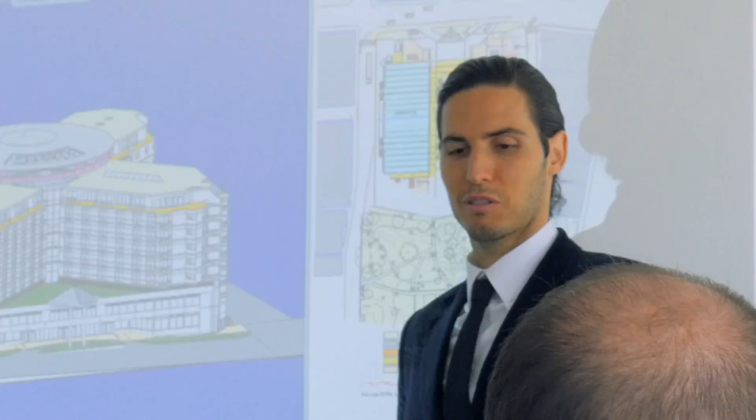The new requirements and legislations may seem too complicated to follow. Our mission behind ARCHLine is to open a gateway to BIM. ARCHLine makes the transition from 2D drafting to BIM step by step. It takes you from 2D to 3D modeling and introduces BIM parameters to your workflow. Sharing your projects with other professionals is effortless. The software makes sure you can use your already existing CAD skills, files and projects to stay competitive. The gate is now open for new challenges and previously unavailable projects.

ARCHLine is an out-of-the-box IFC-certified BIM software. No extra plugins are needed to complete your project because your design will contain everything in a single file. You will work together with other parties of the building industry seamlessly. Avoid misunderstandings. Use real products. Collaborate better than before. BIM is quickly becoming the standard. Make sure you are there with ARCHLine.

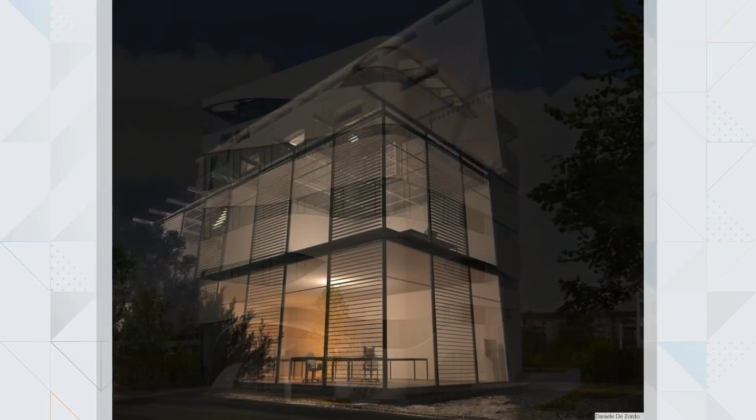Well, this is just a quick selection of images rendered out of ARCHLine models. Some of them were rendered with the integrated renderer, from Redway, the company that creates the rendering engine. Some of them are created with external renderers. I will also show you how you can export your model to perhaps an existing external renderer.

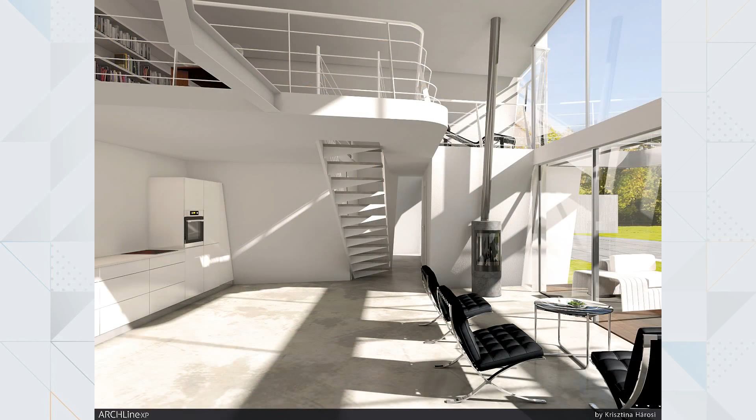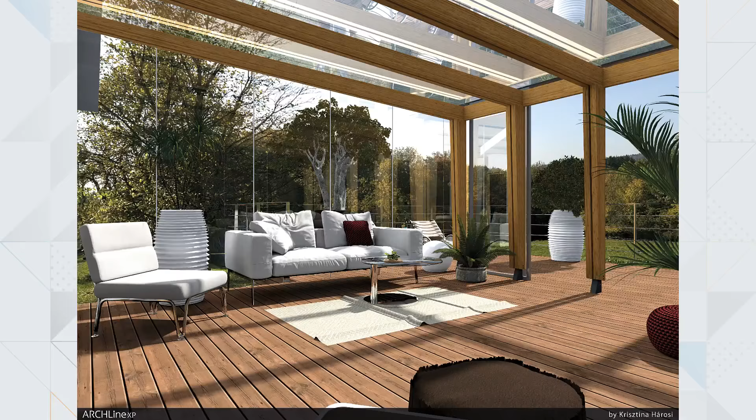As you can see, the project types are various. You can create a small project or a large project, industrial, residential, a school, a shop, or an interior. So it really depends on the project, but it's never limited from the side of ARCHLine, nor from the side of visualization. So with this model, we will try to somehow introduce that.

Yes, so this model could actually be familiar to you. That was the sort of example project we used for almost all the topics we wanted to discuss so far. So before we actually talk about rendering, because that is a huge topic, I think there's one issue we should cover.

We frequently talked about how to bring in information from external sources, one of these sources being Google Maps and Google Earth. Now, a lot of you asked us what happens on the other end of this process — how can you bring this information, what you just designed in ARCHLine, back into Google Maps?

Yeah, that's one type of visualization, for example conceptual visualization. This model is a simpler version of what we achieved earlier with all the details. This is what I will first show you, how you can position it. We actually covered that part, but I think it's worth polishing this knowledge, and then I'll show you how to visualize this model on Google Earth.

First things first, ARCHLine is directly connecting to the Google Maps service. You can use it for free. It's accessible from here. If you go to BIM and set up the project parameters, you will find the project location.

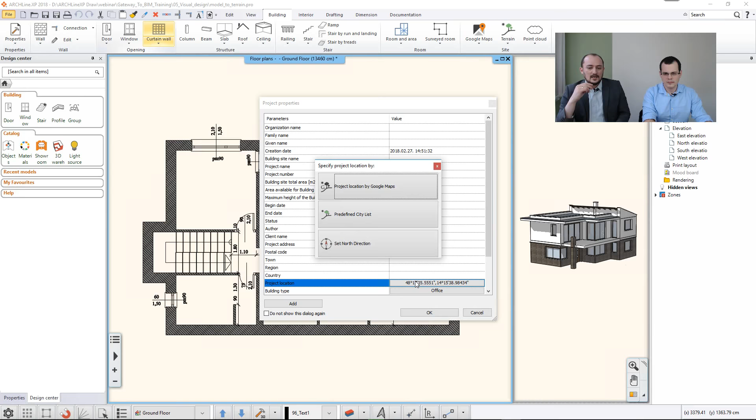This location can be set three ways. The last one is only the north direction, but the other two actually set up the location either by selecting the view from a city list or by setting up the project location in Google Maps. You can also find this in the building node here in Google Maps, with all these options.

When you want to set up the project location, you can go to Google Maps, and either you already find something similar to what you'd like to select, because Google finds your location and positions the marker by default where you are, or you can simply type the address. In this case, we use an Austrian city for this location, which is an empty building site.

That is going to be the address where we are going to put our building. So I just type this address and it finds it. Well, actually we are already there - it just refined the position, but this way you can make your marker appear at the location where you'd like to place your building.

There's one certain point, called the project origin of the building, that will be located over there. If this map view isn't enough, just zoom in and find a satellite view, then position it - that's the empty field, the empty building site I'm talking about. Let me zoom in a little more. So I place my building somewhere around the corner of this site, and when I hit OK, I've set up the building location.

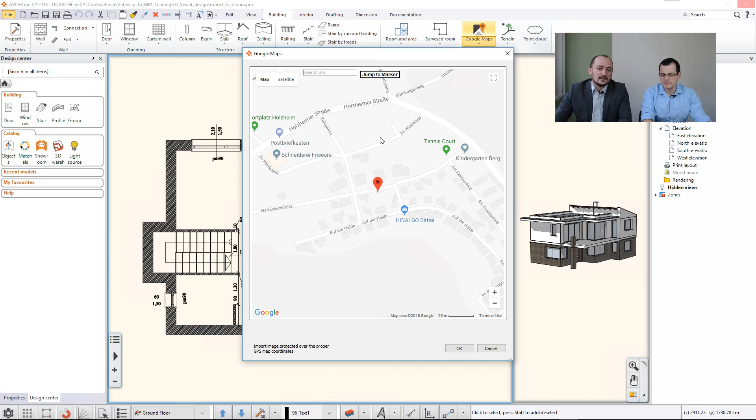But to test whether it's proper, you can use this second option, which is importing the map as a raster image. So using this option, I can just go there - I don't even have to search the field, because this way it already locates the proper site. And then I just zoom in. It's important to zoom in to the view as much as you want it to be cut off, because that's how the import will work.

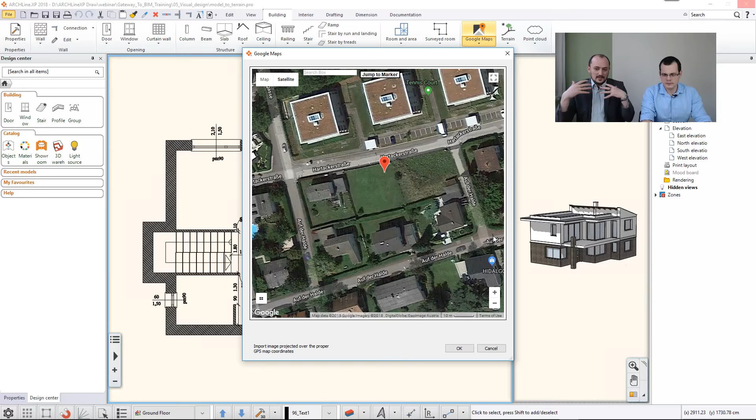Everything outside this frame will be cut off, so if I zoom in, I'll have a more detailed raster image imported. Now I just say okay, let's import it, and I should apply the north direction because I already set it. And then I'll see whether I like the result or not.

Now, why is that? I can't find the building in the location where I specified - we did do it, but it's not appearing there.

In this phase, I did not take care of the project origin, which is normal - I didn't set it up. Let me erase this. Remember it was someplace here. So if I erase this, I see the project origin uncovered. Actually the software did everything well, I just forgot to set this to the right top corner, for example.

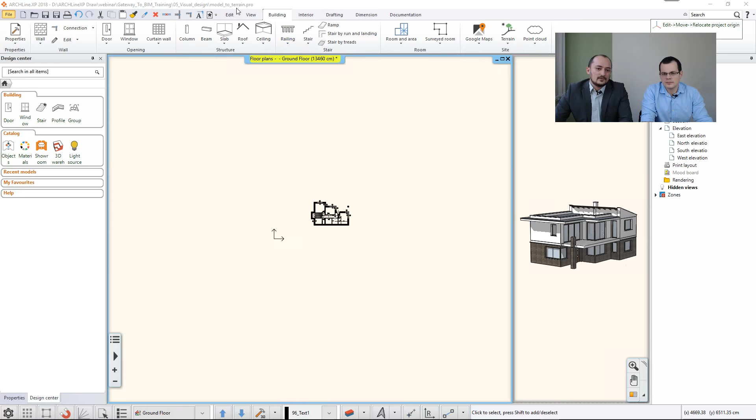This option can be found many ways, but let me highlight one feature of this interface. If you forget where to find a command - for example, I don't use the project origin command very often, but I know there's an option like that - I just type 'project origin' and the software finds it for me. It also teaches me that it's actually in Edit, Move, so I should find it there, and that's the relocate project origin.

Now I need to set up the project origin someplace where these two virtually intersect each other. Let's recalculate this whole thing and import it again. So I go back to the building, Google Maps, import map as raster image, and repeat the same steps. Let me quickly go back to satellite and zoom in. I think this will be fine. Now everything should appear fine because the north direction is okay, the location is okay - it's nicely done and everything is fine.

If I would like to refine it, I can of course repeat this step as many times as I want. But now that I'm done, I would just like to visualize this on Google Earth.

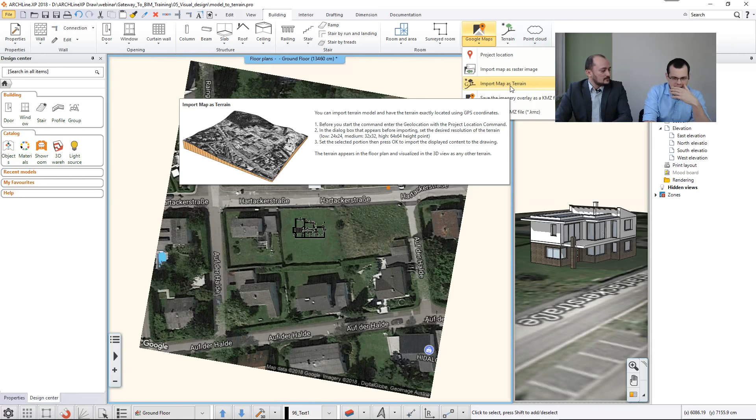Before we do that, let me mention that you can also import the terrain as well - not just this flat ground, but the terrain with height values. Remember during the first show, we created a terrain from two-dimensional data. This is somewhat similar - in this case, you would get the map as a raster image superimposed onto a terrain.

But now let's see how this works sort of backwards, getting this model out to Google Earth. One benefit of exporting to Google Earth is that your clients can take a look at the project in the actual surroundings without having to install any complicated products or CAD software - they just have to download Google Earth and open the file, right?

Yeah, that's right, and there will be one more advantage which I'll show when the model appears on Google Earth. To export this, I need to go here and say I'd like to export the 3D as a KMZ file - KMZ is the format we need now. Then let's just export it, and I'll override the previously created file I have here. Yes, create, and replace it.

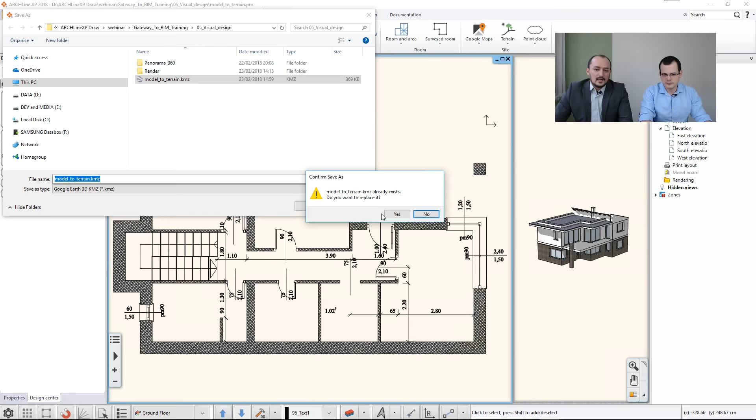This is an important question: since I already created the terrain, I don't need to export the terrain itself, because Google Earth already has a big terrain model, so I don't need to overlap them on top of each other or duplicate them. So I just say yes, please keep the terrain, and then it generates the file, and I can go to Google Earth, which I already opened here, and open that.

This file is in my libraries here, so I just double click it. What happens is Google Earth zooms into that area as much as needed to see this model, how it appears. Where is it actually? So that's the question - where is my model? I positioned it there, but what happens here? Now, because I did not set up a very important value, I cannot see the model.

Let me first show you how even then you can fix this, and then show you what I should do to improve this. So actually, there's the model here - it's in the temporary places. So I have my model, it's okay, I have this project appearing here.

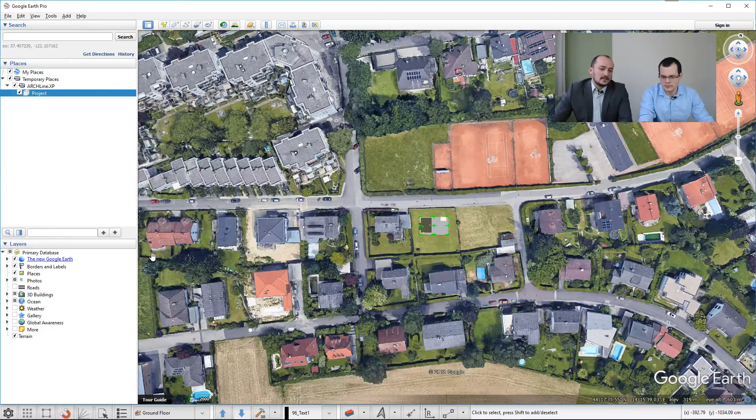But if I right-click there and say let's see the properties and the altitude of this model, that's important - it's not set properly. I don't know the proper height, but certainly this altitude is not correct. So what I should do is select 'clamp to ground' instead, say okay, and then it appears just as fine as necessary. I see.

Now it's clamped to ground, so whenever I move it, it will always stay clamped to ground. Even if I place it here, I can actually move it. So, is there a way to fine tune it? I think it should be rotated a little bit.

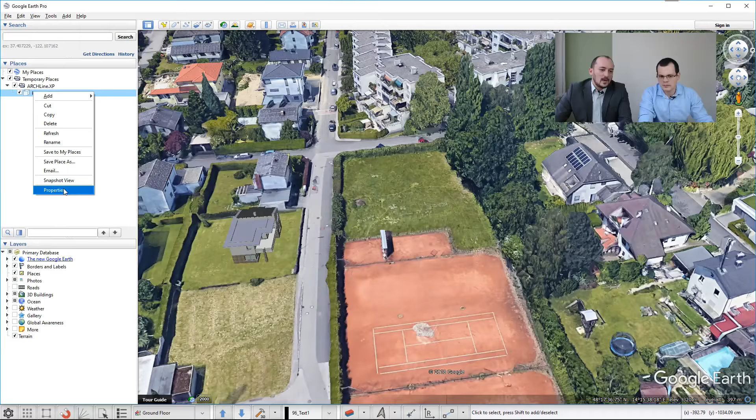I just do the same thing again. I go to Properties, and when this Properties dialog appears, a few markers appear. If I click and drag the center point, I can move it someplace else. I can also rescale it, which I nearly never do. But with this one, I can actually rotate the model and refine its position.

If my positioning wasn't accurate, or if the satellite view is further developed or updated and there's a slight difference from what I used, then I can use this to fix it. And there's an advantage here: the surrounding is modeled. It's not everywhere on Earth, but where you can access it, you get a nice 3D surrounding with all the details — literally surrounding your building. Some places are a bit rough, but it's a very good approximation of what will happen here, and a good way to visualize how the project will actually look on that exact location.

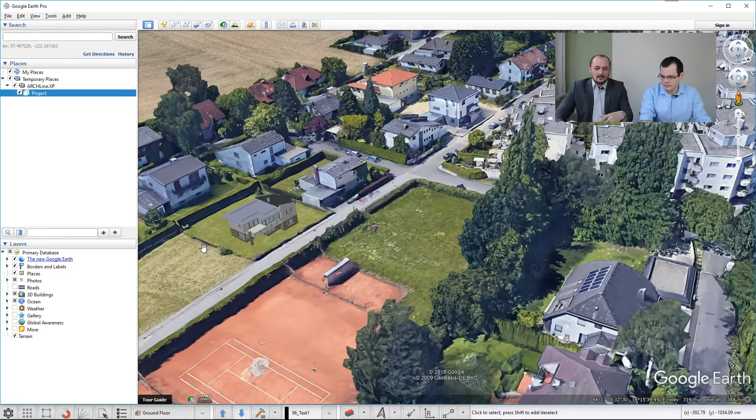What should I do to avoid this mispositioning in ARCHLine? For that, all I have to do is go back to ARCHLine. Let me just minimize this and go back.

What I did not do here in the 3D, we actually talked about when we covered the terrain. In the 2D, I can change the settings for the levels, and there's a very important value: the building elevation above sea level. I believe there we should use something around 300 and some meters, but it was not set like that. Actually, if I import the terrain and then position the building on the terrain, it would automatically solve this issue, so I'd have no problem like that.

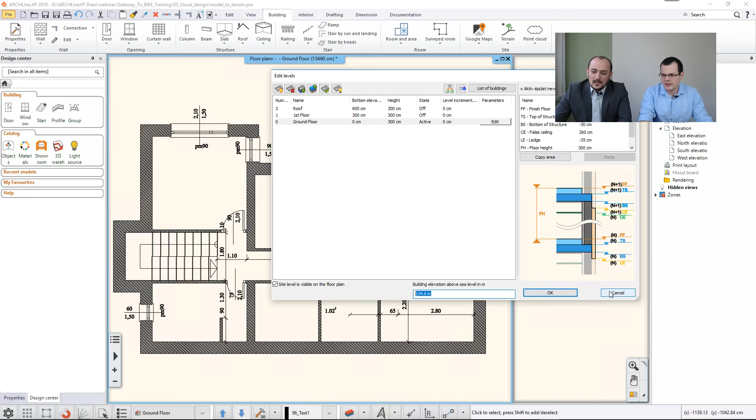But if this happens, no problem — you can fix it either way. So that's about the building visualization, and how to put the project back to sort of reality using Google Maps.

Now, another huge topic we have to cover today is rendering itself. How your renders turn out, as far as I see, depends on two major factors: how the lighting is set up, and how the material settings are managed. Let's proceed one by one, starting with the lighting issue, because you are able to model lighting and lighting effects in ARCHLine — perhaps you can tell more about how they work.

Rendering is all about lighting and materials, just as in reality. If you'd like to take a photograph, light is essential — you won't see anything if there's no light. You can already set up how the sunlight comes in; we covered that part in an earlier session. Now let's talk about artificial lights.

We actually have a few lamps already set here. The difference between these and regular objects is that they don't just represent the body of a lamp, but also have something we call a light source, which appears like a bulb. You can have several light sources, multiple light sources, for one object. The rule is that if you have an object, you can add a light source by going to its local menu, selecting Lighting, and Add/Edit Light Source.

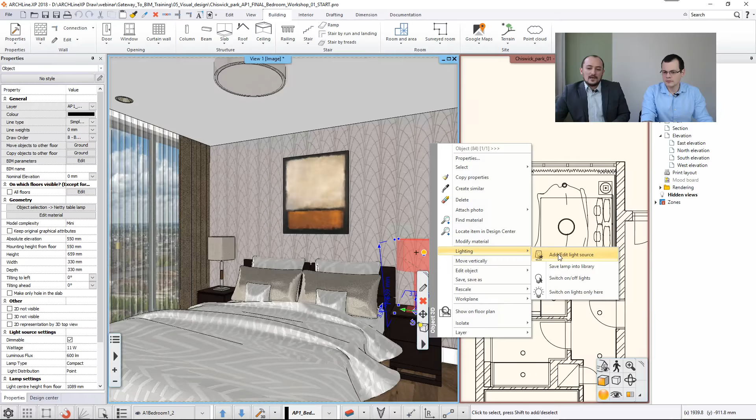By going here, you can make changes: select this existing light source, add another one, change it, go to the libraries and find something you like. You can also create your own light sources, and if you have IES files — those factory standard measurement files — you can use those. They will always give you the most realistic result. But if you don't have them, you can use the built-in default light sources, which will also give a very good result.

So now, how to test whether it's fine — for this, you should always create a render.

Now, talking about rendering, there are several options here, and for this reason, one of the most interesting ways of creating a rendered image is the integrated rendering. And also integrated rendering has two options: one is for the finals, for the final images, and this is for the real-time draft, which I use in between to create my work, my draft renders.

So what I do, I just simply set up a smaller resolution. And then I think I will just leave these options as they are, because I see that they are everywhere, they are fine. Just to cover a little bit of these: this is why I will see the light sources, this is why I will see the sunlight coming in, and this is why I will see something we call bump mapping in ARCHLine, which gives the materials you set up a nice surface feature effect that you can turn on or off, and of course the background, that's something you can set up.

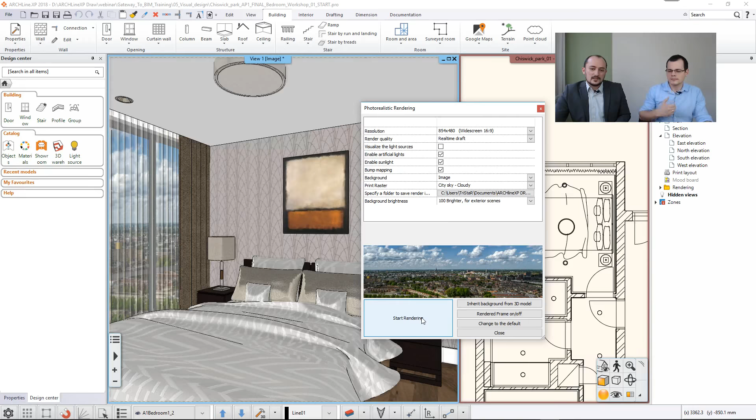So let's just create a render and let's see what happens. Actually, this is what always happens: the software generates the model, it gives it to the renderer, and the renderer opens in a window if it's integrated, or if it opens in a new application, a totally separate application which you can then handle besides ARCHLine. So now I could do something else in the software and I don't have to keep this thing in my view, I could put it somewhere else, right?

Yes, yes, because this is like a regular, normal ARCHLine window. You can go back to the 3D. You can just click on this switch views icon, and then it will be organized aside with all the rest.

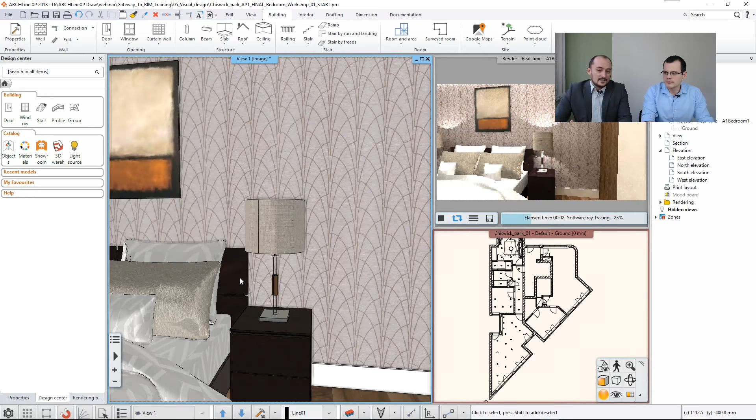So why is it real-time draft? It's real-time draft because whatever I do here, it auto updates the view in the rendering, which is very handy if you are about to set up lights, for example. Let's see how this looks if I turn it off.

If you have a light source like this, if you have a lamp like this, you always have an option at the left-hand side, which gives you the opportunity to handle it as an object, which it is. It also gives you the opportunity to handle its light sources. If it has multiple, you can handle them together by simply turning them on or off, and then you will see the result in the 3D real-time draft. So it's actually the rendering window which shows you the lights as well.

Yes, yes, yes. And actually, it's literally a draft. It's not for finals, you won't send these images to your clients, you will send the finals. But what you need at this point is a very quick approach of what will happen in the final image, but the final image is more crisp and much brighter, much like an enhanced version of what we see here. So that saves a lot of time for you, because that way you can see instant results for your settings, and you don't have to spend too much time doing final renders and realizing you have to change something. That time is over when you create something and wait minutes to realize something was missing, something that you need to recreate.

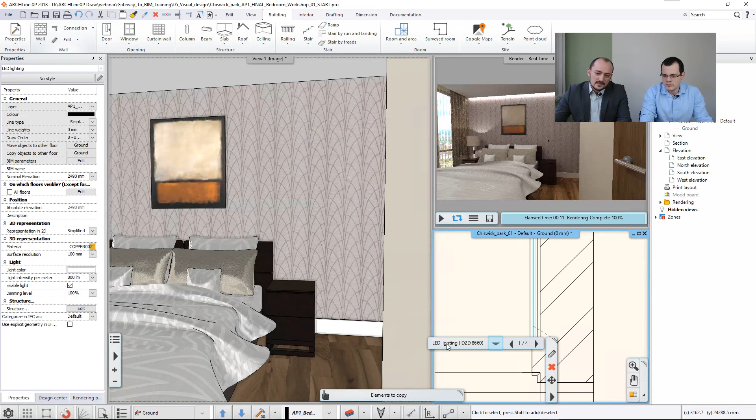Well, actually, if you would like to create light sources, there are many ways. If you would like to create lamps, there are many ways. First, I will show you how to create a new lamp to this place, which I actually erase now. And now I show you how you can create something like this, for example, here. This is an LED strip that we can find here in the 2D window. Let me just erase this. This is an LED lighting. So I just erased that, and the draft updates automatically showing you that now it's gone. Actually, this is the same as if I had turned it off.

But now let me show you how you can actually create that, because I think it's a cool thing to do. Here in lighting, there's the LED light strip. This tool is very simple to use. You just set up the first point, and as you can see, it's literally like drawing a linear item, like a balustrade or a railing or something like that. So I can create a U shape or something like that. When I hit enter, the software creates that.

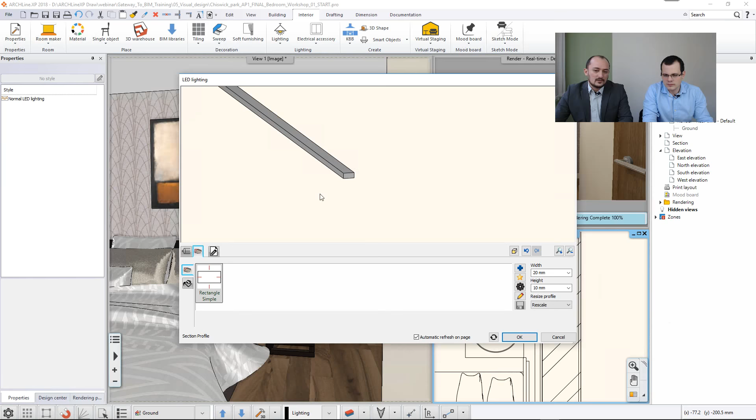I can set up the intensity, the dimming. I can set up some nice orange-like color. I can enable or disable this whole thing. I can set up the cross-section for this actual profile, what I can see here. I can also change its size, and I can also change its material.

So I changed its color to orange, but it's not orange, because what we see here, when it's off, when it's not lighting, or not in a situation where we can see its light, it will be represented as a copper surface.

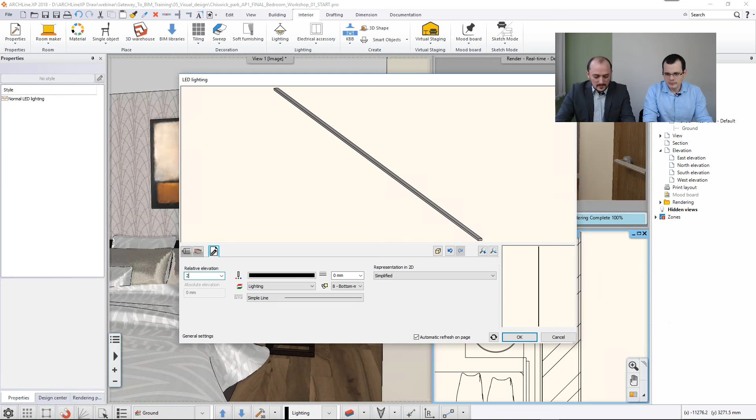So let's just create that, and don't forget to set up the relative elevation, which is measured from the floor. Now it's 2,000, perhaps 600. And let's say, okay, let's just create that.

So the software generates it here, and it also generates at the top. So what you will see, you can change the intensity. This way, it's right away, out of the box.

Actually, what I'm working on is an i7, so it's a quite powerful computer. But in a less powerful environment, like an i5, you will also get results in seconds. That's why the real-time draft is a wonderful thing.

Now, how about adding additional light sources? Adding additional light sources to objects, turning them into objects plus light sources equal lamps - you need to first, for example, download something from 3D Warehouse. The 3D Warehouse we refer to quite often, actually. This is one of the external libraries from where you can bring in data.

Actually I could use the BIM libraries as well. I can import things from BIMobjects.com or Cadenas or other sources. The way is the same.

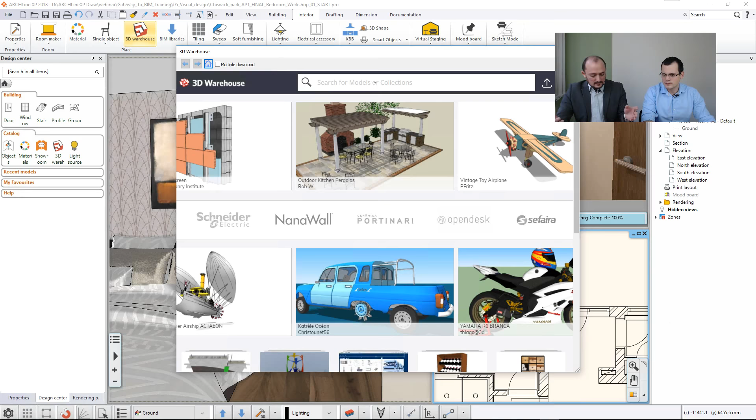So you just find something. I think what we use, I think it was a swing table lamp. Yeah, I just took note here. I like that, I already think that one would fit the project. I think this, it's something that fits the design.

And then, well, you find something like this, you think you like it, you just go download and go with the latest, because... Do they have built-in light sources, or how would that work? They don't, but the software can generate based on a very simple rule.

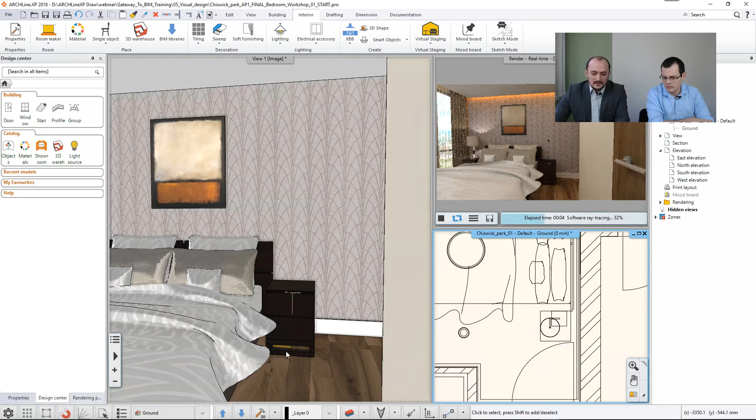Let me just place it here. I just placed it on the floor, so it is literally on the floor. So let me just select that and then elevate it. I just use this up arrow, or I'd say elevate here. So I just place it on top of the surface of this furniture.

Nightstand. As you can see, well, actually this has a light source, but it's not because it had a light source originally. It's because ARCHLine, when it downloads something from the 3D warehouse and the object is named like something light, something lamp, or the name contains something that suggests this should be a lamp, ARCHLine will automatically attach a very simple light source to the bottom of this model.

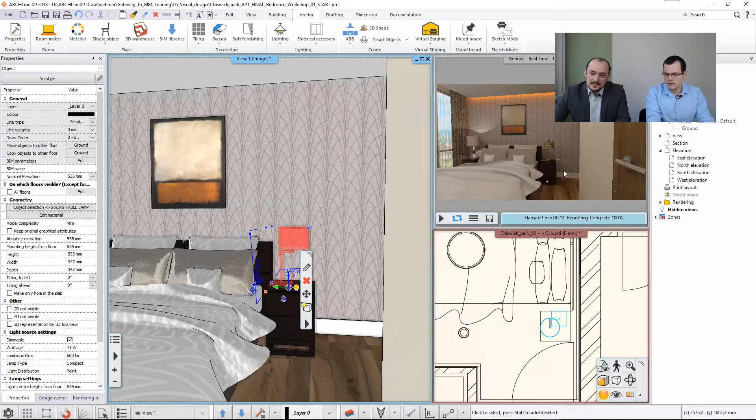And from there you can easily elevate it to someplace else. So that's what I will do. Actually, I can see something here at the right hand side. Let me just zoom into the model, and as you can see here, there is something, and it's from this lamp.

If I would turn it off and on, I could see that this is disappearing, so it's actually because it's here at the bottom. If I just click here, the software changes to the light source, and then I can just pick that point, click on it, move, and elevate it someplace inside the shade.

Now, when you position something like this, take care that you won't end up in a solid body of something. So put it right in the shade and not like this - I could put it here, but of course in that case I would end up with something not realistic.

One thing to ask here: you said that the software recognizes certain elements and assigns light sources to them automatically. I have two questions regarding that. How can you change the light source that the software assigns to the lamps? And how can you add additional sources of light if the software, for whatever reason, maybe because of the naming, fails to add the light sources?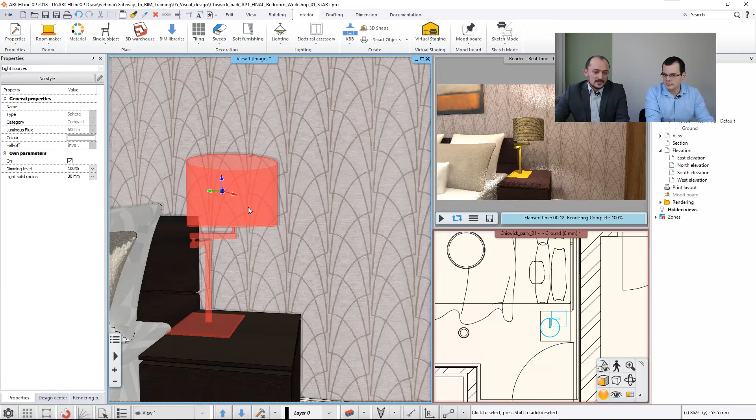Well, actually, that's the same thing as in the beginning, we created or we did it. We just select the item, either in 2D or 3D - it doesn't make any change. You just go to the lighting and edit light source.

So in that case, you will end up with the same dialog. You can also refine its position here, set up a top view and see it's off the center, so I place it somewhere in the center, and check from different views. If I'd like to erase this, I can select something else, or add a new one, second, third, like a chandelier, adding multiple light sources. This way it's done, and the software will update it accordingly.

Perfect. Now let's talk about the lighting side of things. We'll refer back to this topic, but let's proceed with finishes and materials, because I think that's the other factor which has a large effect on how your renders turn out. So what can you tell us about that?

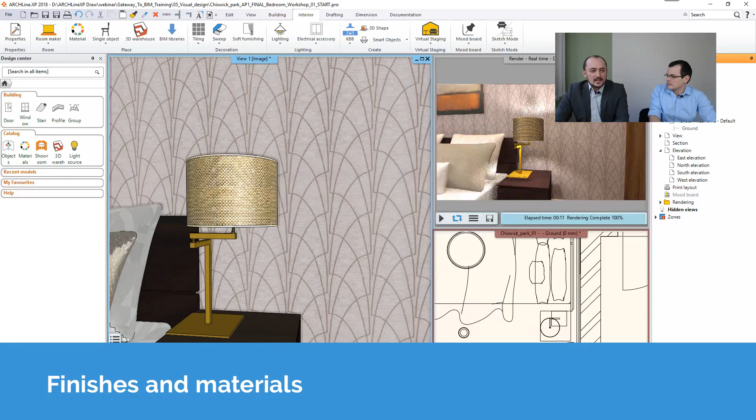The selection of your choice of material will not only change the realism of your rendering, but it will also change rendering time, because the more complex your material is, the result will be calculated longer as well. But of course, many times in sacrifice of the quality. So what can we do here?

Let's start simple. Now we have an imported object which has colors and textures on it, but they are not necessarily set well. So if you'd like to find a material, like represent this as a copper surface or gold, I right click here and say find the material. The software will find that material for me on the left hand side, and as you can see, it's set to be general, no reflection or very small reflections, so that's why it's not like a metal surface. You can go to the libraries, the types, and change this type to something else like metal. By default it will be very much like chrome, but you can change its reflection. Remove a little bit of this reflection, and the color will just face the surface, and you can see it much better.

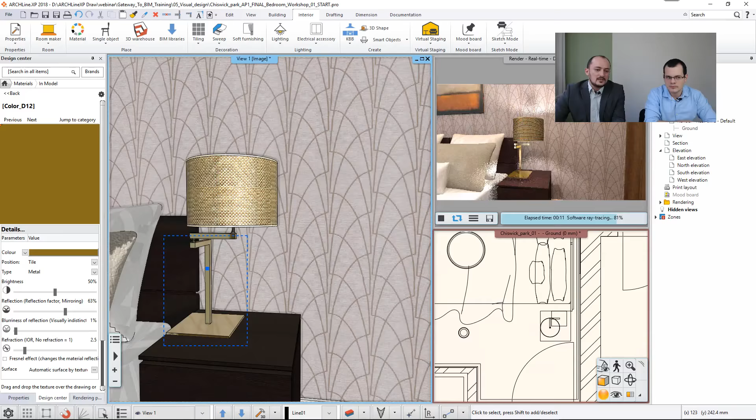You can also make changes for materials appearing inside. If I zoom in, I can change this material, but I think it works pretty well. If I'd like to turn this into something like a metal again, I just right click there, find it, and turn it into a metal surface. So that's how I can do that.

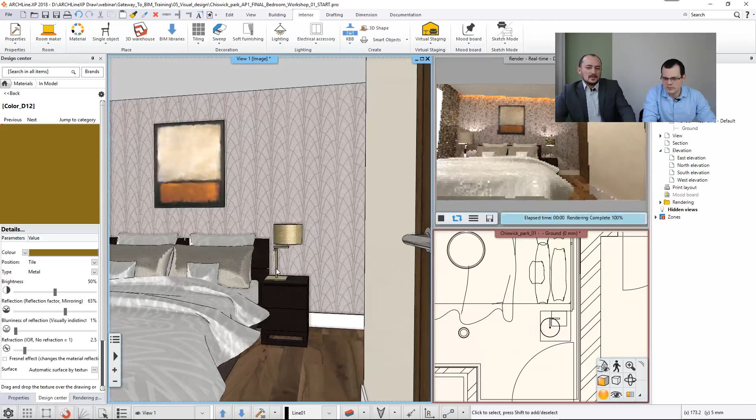But actually, setting up materials is also about importance. In reality, I wouldn't start with tiny materials like this, I would leave it to the end. First, I would focus on the most important materials, the dominant material. In this scene, I have a dominant floor, a dominant wall, a dominant ceiling, and also the textiles are somewhat dominant. So what I would do is first decrease the model size to what's most important for me, set up the settings, and then move on.

This can be easily done by using the layer management of the software. To filter the model, you can either start from the 2D, filter it, and regenerate the 3D. But if you already have the model fully generated, you can do the same thing here. All you need to do is open up the layer walk. Yes, and here you can find all those layers that you've created. My suggestion is that you should, at least if you're working on an interior design like we do now here, distinguish what you have from room to room.

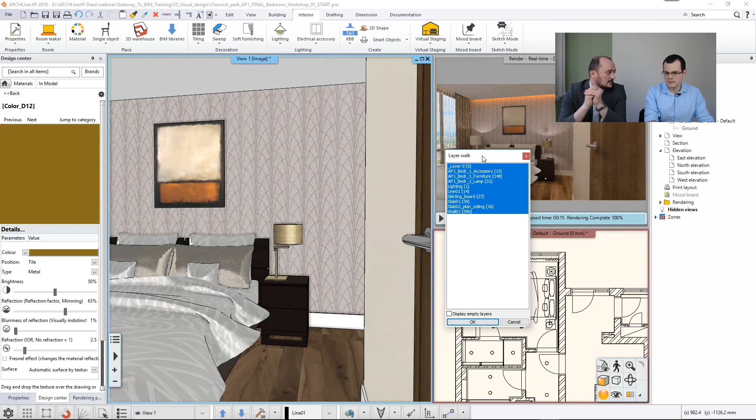Separate the content as accessories in one layer, furniture in one layer, and lamps in one layer, and the rest can go anywhere else, because usually the interior is the most complex. If you work with exterior scenes, you can do the same thing just with the foliage and other things like that. So you will just disable the less important things for now. Let me remove all these things that keep floating over there. But anyway, what we see now is just the surfaces.

What I can see here is quite a reflective floor. Let me just move the zoom someplace like this, so we can see easily that it's very much reflective.

To cover how this works, you can go to the Find Materials option, and there you can find the same settings. Now, if this is set to be mirror, this will usually be a perfect reflective surface. Well, that's a bit too much, I think. I could also tweak this, set up a blurriness for reflection, and then the reflection will be less of a perfect reflection, but more like a metal-like surface.

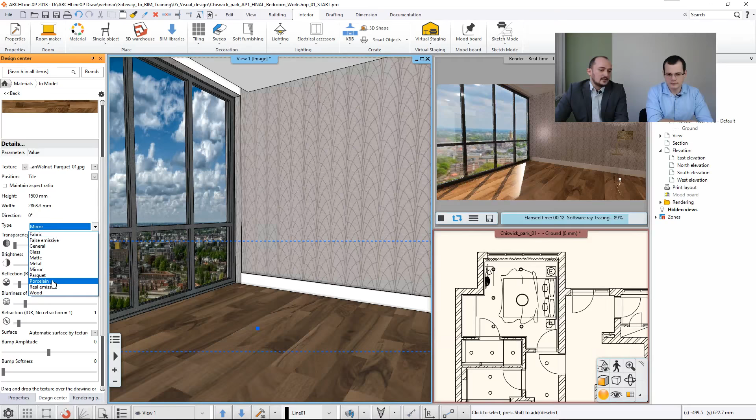But if I would like to, I can go and select something else from here. You have preset options available for these elements. Actually, I can turn this into parquet. There will be some nice settings coming with that. The software recalculates this whole thing, and it will be a little bit glossy parquet surface.

Or I can use something else like the general surface. Now, talking about general, let's use it here on this wall surface. Let's just find this wall material and see what this has. If I right-click here, find material, yeah, that's right, good, so one, find, yeah, and then let's just go there.

This is actually matte, which seems to be working fine, but actually in reality we are not surrounded with matte surfaces, not that much. Very few indeed are real matte surfaces. Most of them would fit mainly into those other categories, or if you cannot find them, in general. And what you should do, you should always add a little glossiness, a little reflection to your surface.

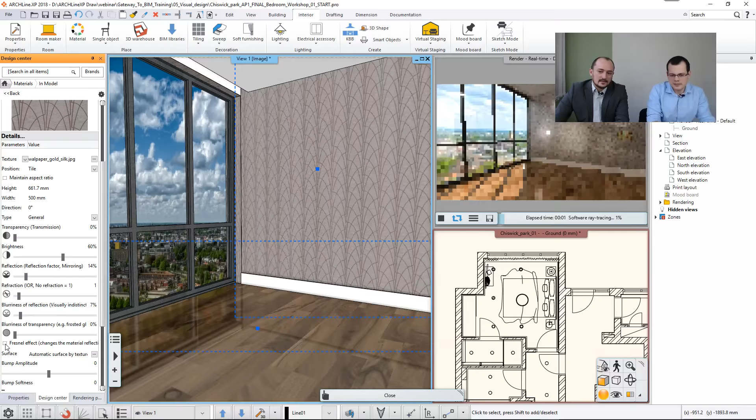What I will show you is another important, interesting thing, is that you add some reflection to this. Let me just add a little bit of blurriness, a little bit more reflection. But it's still not reflecting anything. Why is that? It's because of this Fresnel effect here. If I disable that... what is that? So it's like metal now. It's reflecting a lot, and it's metal-like because it is reflective but blurry as well.

So if I just increase this, it's much better, but still not what I want. If I enable this, then I will get a realistic surface, which is reflective, but it's reflective like our wall is reflective. Not that much, but from certain angles it will be reflective.

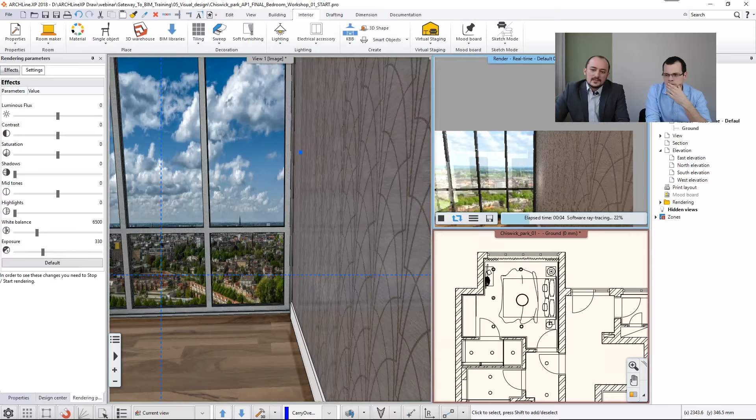Like this here, if I turn the camera to this side view, then you start to see the reflection, right? Then let me just zoom in a little bit more so we are not distracted by this lamp here. So here I should see some of these reflections appearing, but it also depends on the refraction of this item. If I increase that, this will come a little bit more, or if I decrease that, or if I increase the reflection, then it will increase or decrease this feature, which most of the surfaces around us have.

So it seems to me that the rendering process in this respect is mostly about tweaking the settings until you find the right result. So there's no clear-cut and automated way to reach the final result, right? Well, sooner or later you will end up with a lot of materials that you like, that are for your taste, that you created. You can use those. If you find a good setting, you can save that in your libraries and use that as a basis for new materials.

But also the software, just as in other cases, is shipped with built-in materials. So if nothing else, you can just find something, for example, we have built-in material for the bright white ceiling. We have built-in materials for the wallpapers. We have built-in materials for flooring and so on. So you can find those, check their settings, and adapt that to your own material, your own fabric, or whatever you create for that moment.

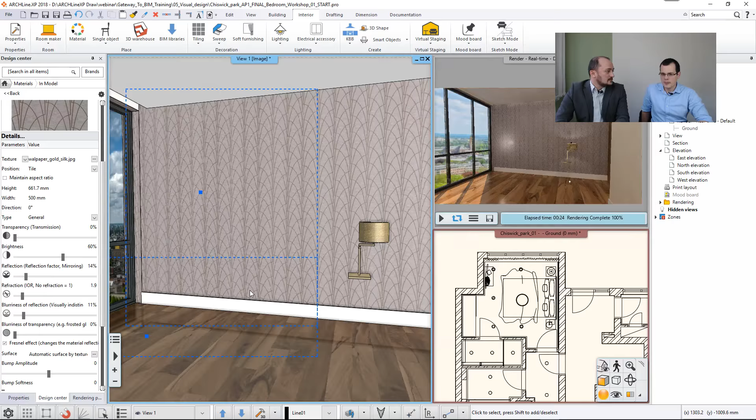Perfect. Now, we showed a couple of renderings here. We mostly talked about the interior, the integrated renders, but we also have a standalone, separate rendering engine. So how does that work?

Well, if you would like to work with third-party renderers, so if for any reason you do not want to use the built-in renderer because, for example, you already have a license for Artlantis, then you can use that. To be able to use those rendering engines, you need to actually export the model to those renders. You just build up the model you would like to visualize, then go to File and Export, and find those rendering engine outputs you would like to create, like Artlantis, Cinema 4D, Thea, or all these. Or for example, most of them also support FBX, or they also support SKP, 3ds, OBJ.

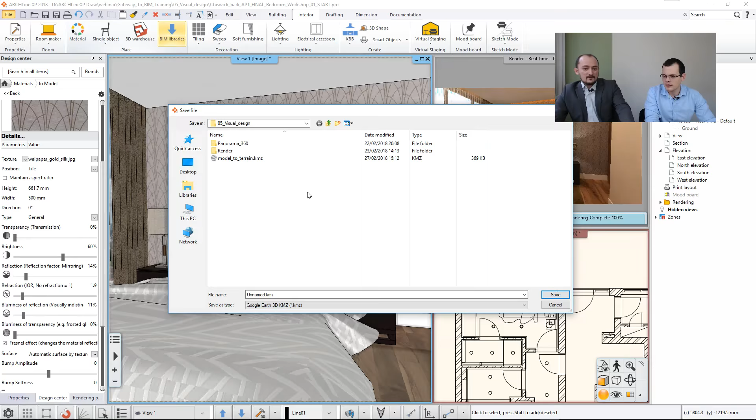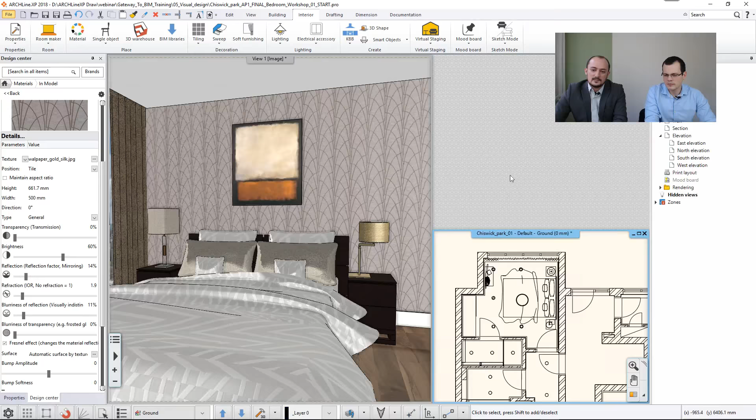You can use these file formats to export your data. But staying within ARCHLine, if you'd like to create something of production quality instead of draft quality, what you need to do is, instead of rendering in real time, create a final version, either integrated or standalone. Let me show you standalone rendering for that.

So what I do here is start the same thing, just in a separate window, and then launch the rendering. But before I do that, I forgot to mention one important thing: this render frame on/off option, which is connected to this value.

If I enlarge this 3D window, you will see... let me change the size since it's nearly the same ratio. Let me squish it a bit, and now you can see some gray areas. This is actually exactly what the camera will see.

So if I set up this view, which is an A1 bedroom view, this is what I will render. If I'm fine with that, I can go with it. If I'd like to turn the camera a bit to the right because I don't want to see this, that's fine too. This way I can easily find a perfect view that represents only the things I'm interested in.

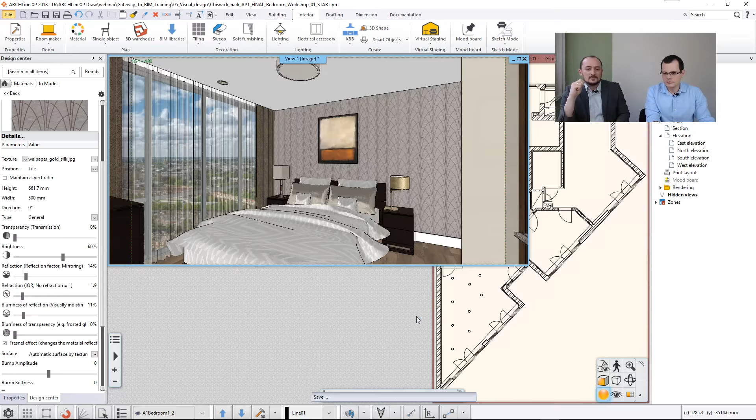Then I go to rendering, find standalone rendering, and simply hit render. The process is the same—everything is generated again and passed to the renderer, but this time we do some final renders.

But meanwhile, you could be doing some work in ARCHLine, right? Because whatever you do with the model now won't influence the render. Yes, that's right, and that's something you can do.

But if you're doing finals, I usually wouldn't recommend working simultaneously, because rendering uses a lot of your CPU and RAM—not the GPU at the moment, but it uses CPU and RAM heavily, as much as possible. So if you want to create your finals and finish them, you should leave it to work, and then save the finals, which is actually done automatically by the software—you can set up an autosave path. But I always suggest saving the model and the rendering at the end as well.

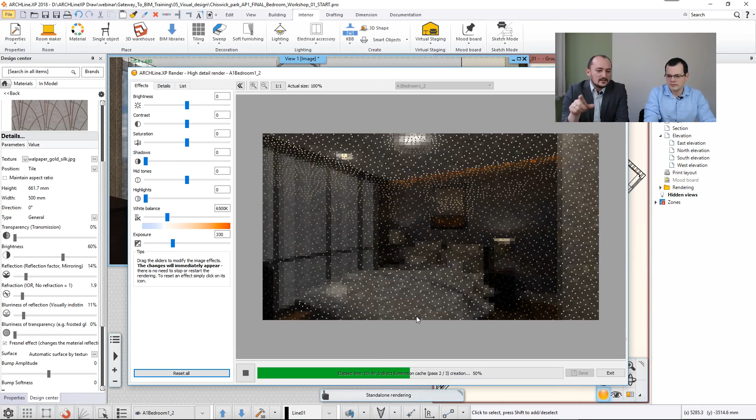And what we can see now is quite different from what we saw before. Yes, it's a different way of putting it together—it's like an analytic creation of the model first, in order to create a precise, fine, good quality render at the end.

And after these things comes so-called ray tracing, when the renderer literally traces all the light coming to the image in front of us, and then generates the final image, which at the end, with this button appearing available, we can save.

Now what we see here is this. In the details, it's the high detail render, which is the slowest—this will take the longest time.

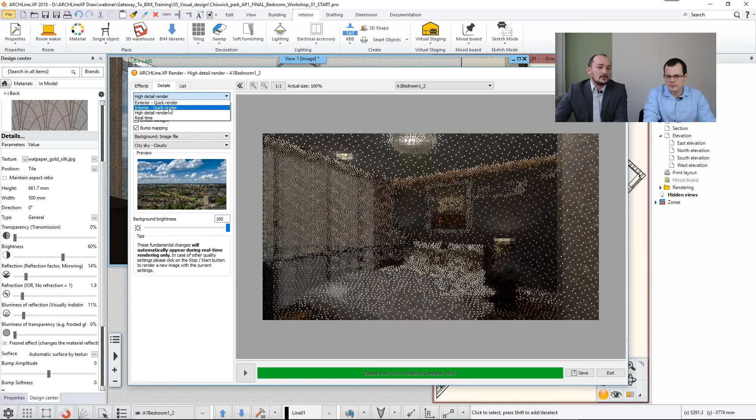So I actually don't wait for that. I'd like to show you another result. I'll terminate here and select something called interior, or even exterior will work. Let me show you that. What happens here is something similar, just much faster, and the result appears at the end—crisp, clear, everything smooth, clearing up bit by bit. So it will take a few minutes, but at the end it will be very smooth, nice images.

So if exterior, the fastest option next to draft, creates a clean image, why would I use the others? Why use interior, and why use high detail even when it takes this long—probably an hour compared to exterior finishing in a few minutes? So why use that? Any tips on how to influence the result even before it's finished?

I know it's not a draft, it's going to be a final render, but is there any way to tweak what I see into something I prefer? Yeah, before that let me finish this. I just wanted to show the image, because if I would render this in exterior, interior, or final, the most detailed, I would get the same exact result, because it's a well-lit environment. The lights are traveling nicely, there is less diffuse light.

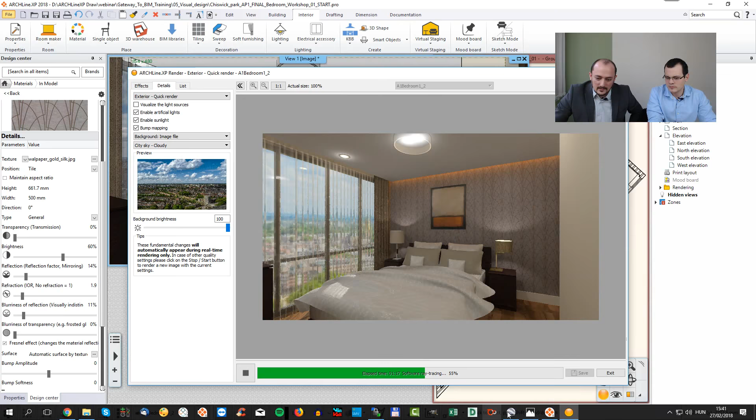If I have a lot of diffuse light, I prepared something for that, and this is continuing to render. So now I have something. This was rendered with the exterior setting - see, it's crispy, pretty noisy, not something I like. It's simply because there was not enough time to calculate the final image. I just told it to render exterior, and this is much time that you have got, so it could not finish it well.

So if I use the interior, which is better - now if I zoom in, I can still see a little bit of crispiness here, but not that much. This is actually already clear, so I could say I'm fine with that, let's just go with that. This could take a little longer, but if I go with the detail setting, this is the cleanest version in this certain situation.

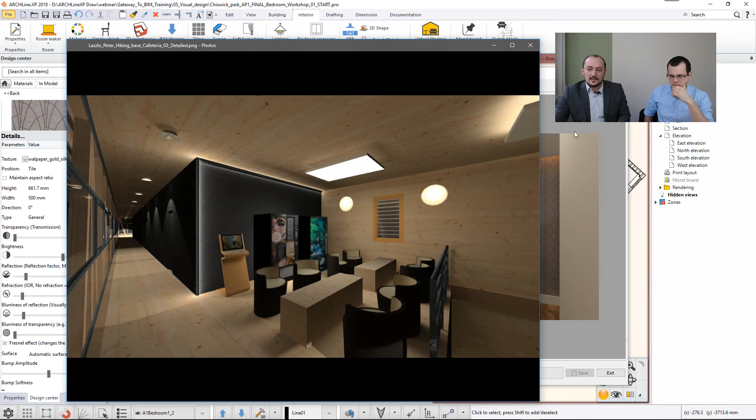As you see, if the environment is not well lit, there is even no sunlight outside, then it's useful to have these steps. But if your environment is very well lit, you will go much better with the others. So, answering your earlier question about how to make changes for the rendering - actually you can do this during rendering.

First, I'd stress using the exposure. In case of interior renderings, usually you'll need to increase this. The default value is not set for that because it needs to work everywhere - it's just a default value. You should increase it to a point when you like the result and say this is as much brightness as I would like, I want to see my whites, my white areas.

This will sometimes wash out some of the colors a little bit, but if you change it wisely, you will end up with the same vivid result, just a brighter version, like there is more light coming in. Then you can go with the brightness - I just stress, don't overuse them. Just change them a little bit if you want. If you don't like the result, just push this button and it will jump back to the default.

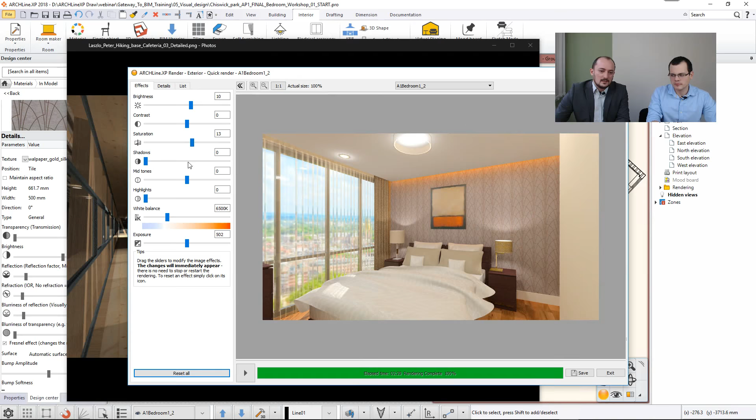You can change the saturation - I don't change it too much, just a little bit. You can make the dark areas a little bit more strong. You can increase or decrease how the mid-tones are stressed out, and the highlights as well. But use them wisely.

If you just work - again, this is trial and error, right? So obviously after a while you would have an educated guess, but until that, you would just have to experiment with these settings. That's right.

At the end, if it's done, you can still work on these things, and you can save version 1, version 2, version 3. I think now the shadows are too strong because I lost a lot of information here, so I just dial this down like this. Then I just save one version, another version, brighter or darker, and so on. And at the end, I compare it in an image viewer and keep the best. Perfect, so that's how you can do that.

And in the details, you can change all those settings, but for these things you will always have to re-render the scene. Yes, for these effects you just need to change them and they will appear automatically.

That's right. I think at this point it would make sense to talk about some tips on rendering time and rendering quality, because looking at the questions viewers are asking us, most of them are about how demanding the rendering is on your computer, how you can tweak the settings, and what kind of resources you would need on your computer to get the right results. So a couple of tips on rendering time and quality factors that will be handy. I think these pretty much cover that topic, but to give you an idea, mostly it's about the computing power that you have.

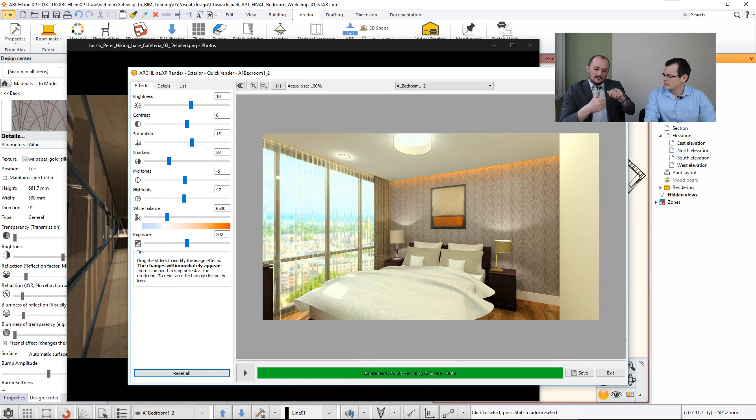Usually, if you would like to avoid long renders, all you need to do is filter your scene for lights, filter your scene for geometry to remove things you don't want to see or actually cannot see. For example, when you generate a model of a building like we're sitting in, I render to that direction, but there are other rooms filled up with lights and objects. To achieve the best rendering result in terms of time, I should turn off everything I already know won't be visible, because if I give the whole model to the renderer, I force it to calculate things that I already know won't exist.

For the rendering engine, it's a matter of time and calculation. Like this here, this is a good idea, a very good example. This whole apartment was well designed, but since we didn't need the rest of the drawing, only this particular bedroom, we switched off those layers we didn't need. Because otherwise, even if you wouldn't see it on the renders, those elements would be calculated anyway, so at the end they won't be visible, but for the software it's a matter of calculation to determine whether it's visible or not.

So to conserve that time, since I already know this shouldn't be calculated, I simply don't give that to the renderer, I just turn them off. I use the layering system to turn everything off that is not necessary for that specific scene, and then I render it.

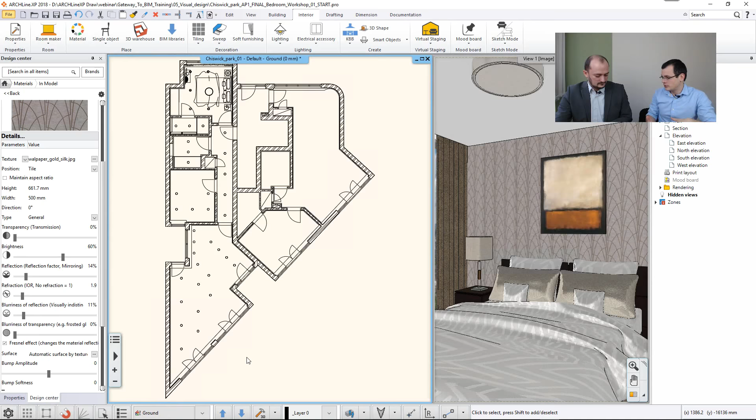Now another good idea regarding renders, since it's an up and coming topic, is that you have to show your clients the best you could how your model would turn out. I think a very good way to do that would be a 360 render where you could take a look around, or at least a 360 image where you could see the space around you. Now how would you create something like that?

Panorama 360, which ARCHLine.XP supports built-in, is a very good way. Even if it's only a draft, it's something you could use well, but ARCHLine is also able to perform this in a rendered result. You can find this feature here in the view, there is Panorama 360, and those are the settings for that.

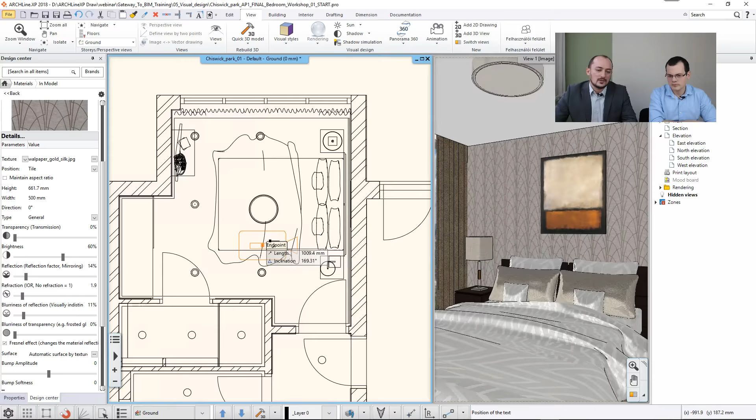First you need to set up at least 2 cameras, because then you can set up a link between them. What you do is place the camera and name it accordingly where you'd like to use it. I'll name it bedroom. You can place not only one camera, but this time the model isn't too large, so I just place one camera here, and then I'll also place one in the corridor.

This could also be 1 or 2, but I just place one, and then I don't do that anymore. I rotate the camera using the rotation marker to set up the default view the camera will use, the software will use when you enter that room. This will be the first shot you will see. Same thing for the corridor camera, let's rotate that 90 degrees and move it someplace like here.

And so there should be some connection between the 2 cameras. Yeah, that's what we call a portal here. You can set up a hotspot between these 2, so this hotspot will link, in a certain elevation, this camera to that camera and back. So when I'm at this point, I can travel back to the corridor and the other way around.

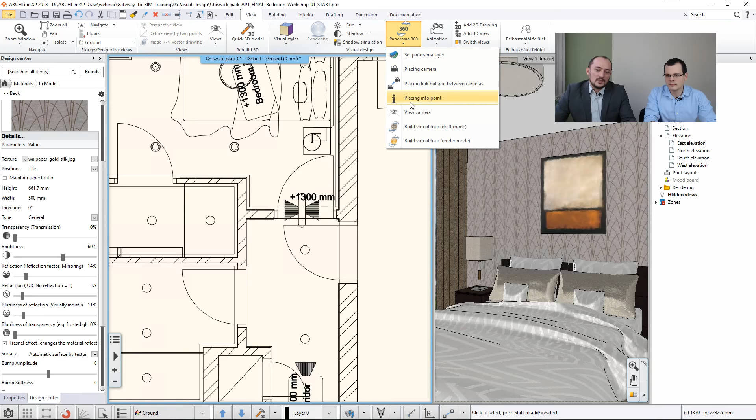I don't want to place another one, so I already have a camera, and a link between these two. If I select this link point, this portal, it will automatically show that it has two ends, which is good. To see what happens, I should check what these cameras see, using the view camera feature.

Let me enlarge this. So this is what the first camera will see. It's not the best, so let me select this and move it a bit more backwards somewhere here, and retest it. Let's view this camera again. What this camera sees now is a bit more something that I like. I can do the same thing with the other one.

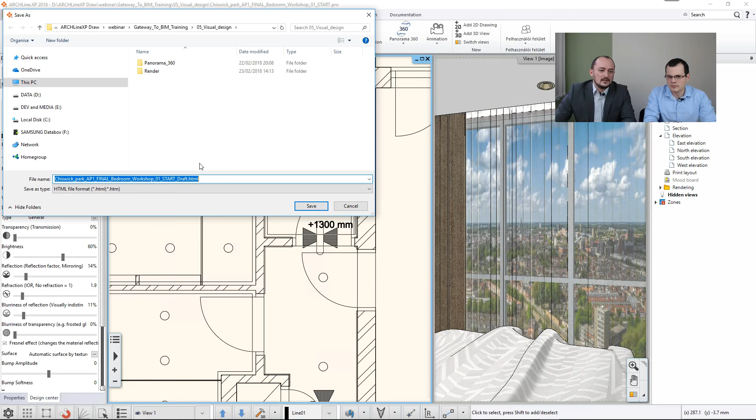To generate this, I can use this virtual tour in draft mode or in render mode. The draft mode is actually what we see. Let me save it here. I think this will be just fine, and then the software generates it.

It generates a panoramic 360 at certain points, and this is what happens. It stores it into an HTML file, and it actually auto-starts this whole thing.

I can grab it and look around, up and down, in this draft quality, and there's the portal that I've set here. If I click on the corridor, I end up in the corridor, and that's the door of the bedroom, so I can look around. It's a good way to give clients a concept of space, because you can take a look around and see how it feels.

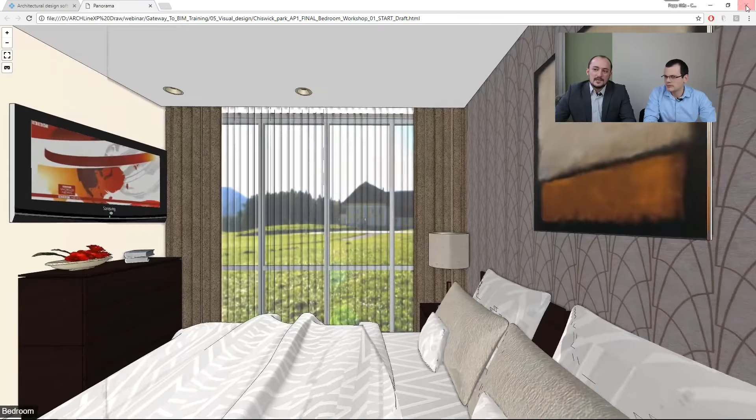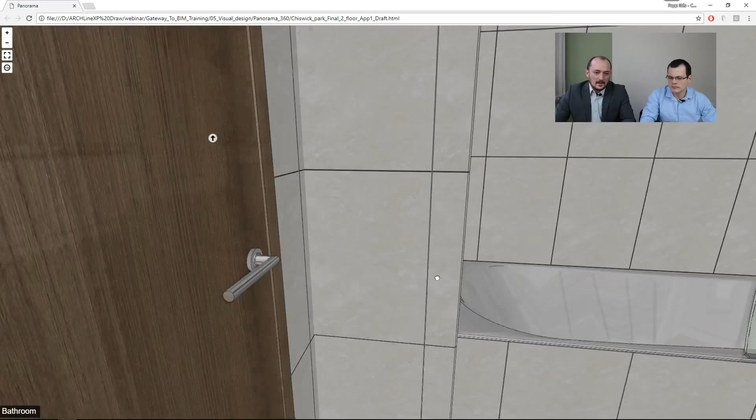Let me show you the final version of this, because I already have a full-featured, rich version. For example, the first one is the same thing, just starting from the bedroom, also using traveling points like this here. I can go to the living room to check it out, but this is still not rendered.

This is not that realistic, just a draft. To represent that in a realistic view, you should use the other option to render it, and then you'll end up with something like this.

So each and every room was rendered in 360 and then generated into a high quality image like this. This way you can travel through it.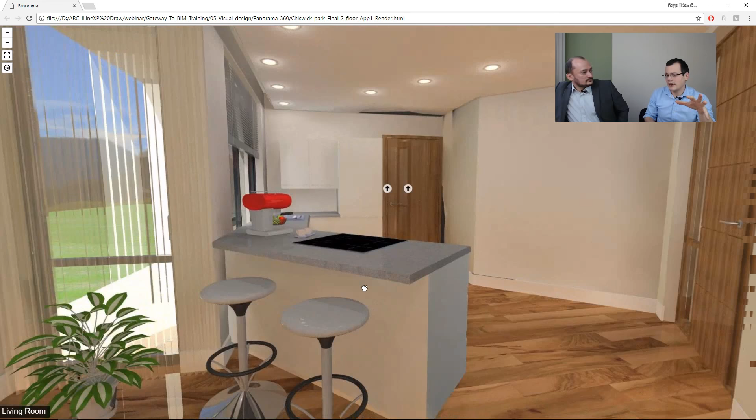There's a way to get this into your clients' heads. I'm not sure if you're familiar with these devices, it's called a VR box. The way it works is you load your project as an HTML file onto a smartphone, put the smartphone in this holder, put it in these goggles, and then put it on your client's head.

I'm not gonna do that right now, we have a video to demonstrate that, because I think I would look silly with this on my head. But the concept is basically this. Let me just show you.

So what you'll find is something you can look around in, and you can still travel through these points using that VR experience. If we have the video in a separate file, I think we can show that. Again, this won't actually allow customers to interact with the objects, but I think this would be a very good way to.

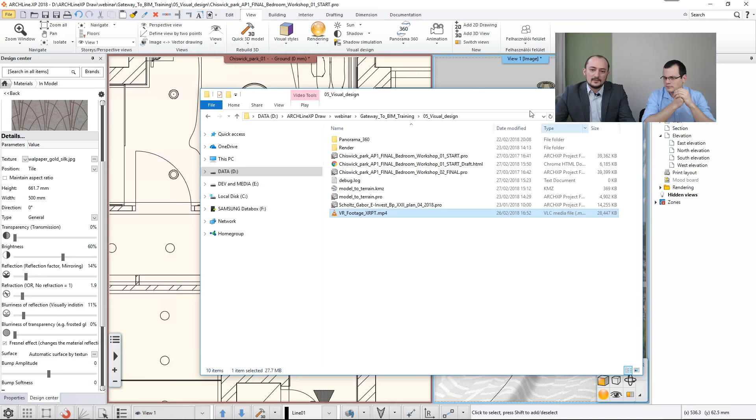Yeah, that's right. So this is what they will see on the phone, and when you set that up, you will see a split screen view, and this way you can travel through the room and just turn your head around and do this. Just zoom on the thing, the portal, and then you just move from one space to the other.

What about animation? How can we get animated results from these? I think VR would be one way, but if there would be a way to sort of pan around the rooms, that would be a good solution too.

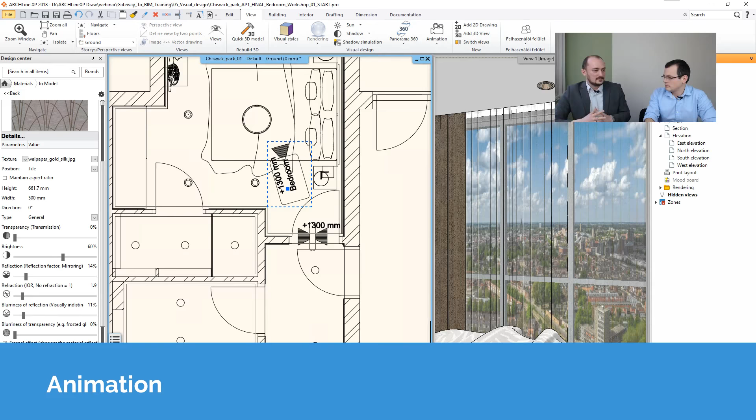Before we move on, one thing we talked about is this cheaper version of VR when you don't have to invest, I don't know, $1,000 or something. But if you'd like to use it with a dedicated computer with this VR thing, you can check these export formats and see if you can work with that in that environment.

So going back to animation, animation is here. It's not object animation, so you cannot animate cars moving or something. This is camera walkthrough animation, when you animate the camera going through the model, and then the animation will be rendered in this quality, what you can see on the right hand side. This won't be a photorealistic result, it'll be something like what we see here.

So how to do that? First, you need to set up a path. This will be the path of movement of your camera. Let's start from here, go through here, and draw this path like a nice curvy path, and then here. Then what you need to do is set up the point of interest from each and every spot of your path, so where you're actually looking at.

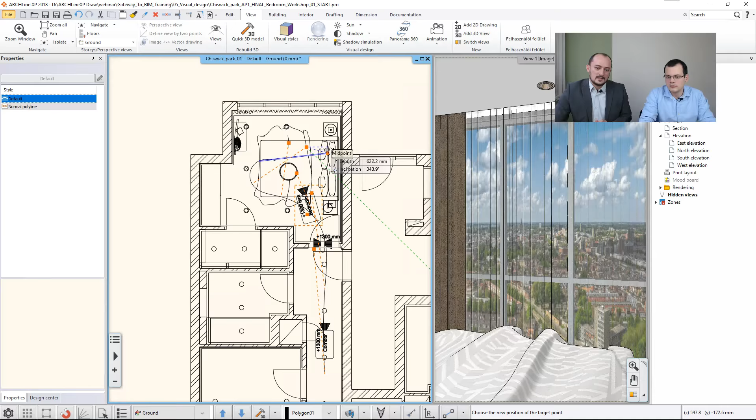Yeah, so here I think I'll just nicely turn to this point of the model. I just hit enter, and then I hit OK to preview what I've got here.

Now I actually need to open this door a bit so we're not just passing through a closed door. It's like 75, like that, and let's just update this view again. This is something you can easily do by simply going to the details and saying this door should be opened. Let's just change it again, 75%, yeah, like this is now open. Let me just check in the model. Yeah, it's open, fine. Let me just go back to this path and preview this.

So now this is what I've got. If I hit play, then it goes through. It's a bit fast, I believe. So what we should do is stop that, go back to the beginning, and change its settings, first off the length, and let's play it again. Okay, it's much better, less hasty.

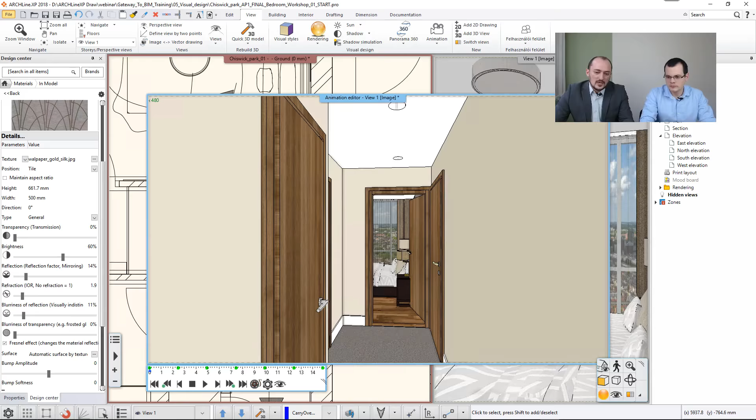Let's go back. Then at certain points, these key points, you can change where the camera is. You can lower the camera here, and perhaps here too. You can change the position of the camera, and the software auto-animates this using these updated heights. So you can elevate the camera, go through, and then decrease it. You can do all these movements at the key points, and the software will animate those through.

As you can see, you should select a panoramic background for that, because now I just used an image, which isn't the best. ARCHLine is shipped with panoramic backgrounds as well.

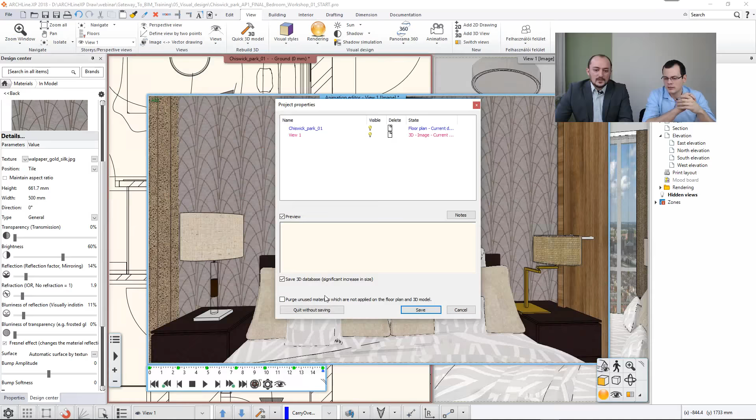Perfect. Now, a couple of times it came up what happens when you want to do exterior rendering. Before we talk about that, can we show an animation example of a building from the outside? How would you go about that? Let's bring up the project we were working on before. I think this will be the final version of what we achieved at the documentation part.

So let's see what happens if you want to animate certain viewpoints on the very same object. Yeah, so now we have this here, and if I would like to create a pan camera panning around this building, I would just do the same thing again.

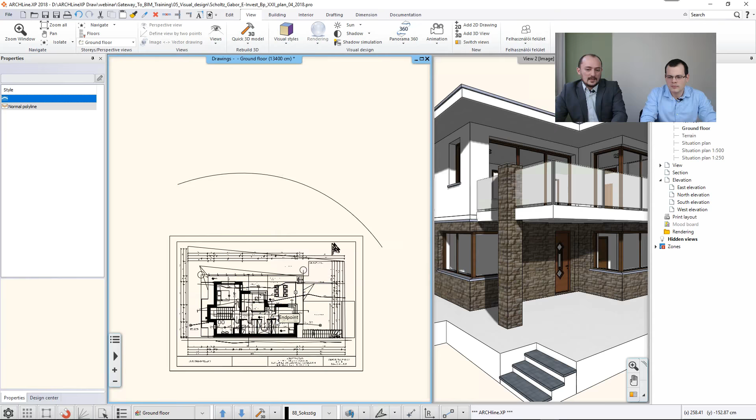I just set up a point here, and perhaps a point there, and then enter and set up the view to perhaps the same point, but sometimes you can move it, then say enter and okay, and the software will create the same preview. Now we have no surrounding, this is just rough. But if I turn on the surrounding and do the same thing, I can do this same animation from outside.

What kind of format can you save this into? This can be saved as an AVI file, as you can see. You can use third-party converters to convert it to anything, but this is already something you can either export or upload to your YouTube account to share with your clients, or directly send them. Usually direct sending is not the best for AVI files because they are quite large, but online sharing works well.

You differentiated between interior and exterior renders quite a few times. So what are the specialties of an exterior render?

For an exterior render, first things first, the background becomes more important. So first things first, what you need to set up well is the background. Sometimes a photograph will do, but if you would like to create a lot of views, then you should set up a few render backgrounds at rendering, or at least find a nice panoramic background, which you can also do in 3D as well.

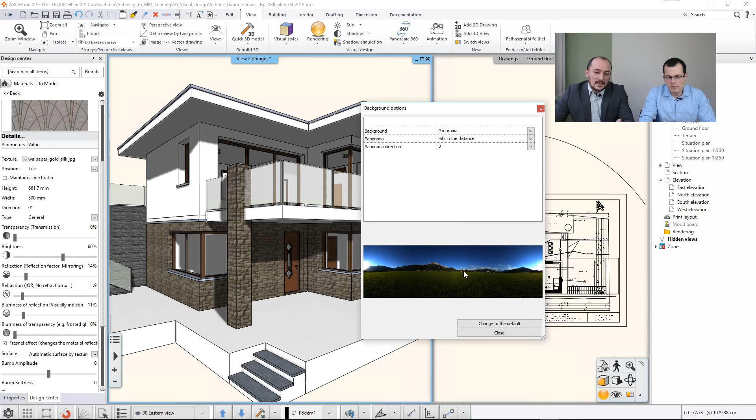You can go to the environment background setting, and instead of using a uniform color, which I have now, I can set up a panoramic background like this here, or go with this sunny plain or anything else, say okay, and the software creates this view around it, and then I can render it. What I stress when doing these renders is I'll just simply do a draft render for now.

You should enable sunlight, but you don't have to. If you turn off sunlight, you will end up with a day like what we have now here, when the sunlight is not directly hitting your model, but instead you will have some nice diffuse lights and shadows. So you can do that.

If you would like to create a nighttime scenery, you should set up the nighttime setting using the location settings and things like that, and then you can turn on the artificial lights also in the interior.

Take care of the background brightness. In case of exterior scenes, these are the suggested values here at the higher part of this thing. If you are using an interior scene, you should use those settings to avoid over or underexposed backgrounds.

I should also highlight how you should set up the effects. In case of effects, this exposure that we can see at the left-hand side is 330. It's again not that it's the best, it's just the default setting, which as you can see in exterior scenes, sometimes you just simply need to decrease to something much better to avoid burnout surfaces.

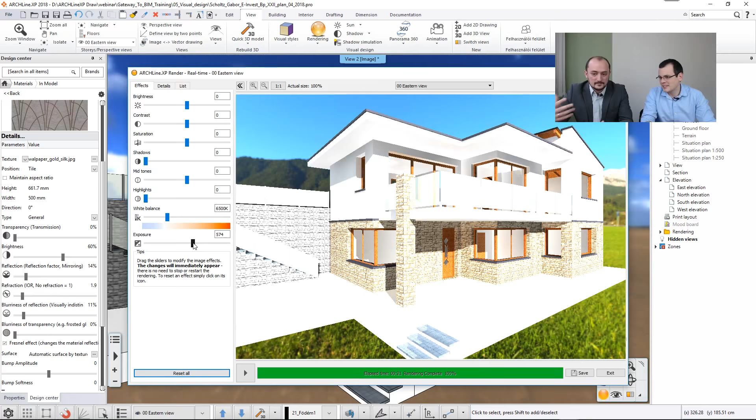Now I have quite a lot. If I increase it to the value that was good for the interior, see, you will end up with something that is not good. So like I said before, it's mostly trial and error, and one recipe would not necessarily fit another scenario.

This is simply because the rendering now has a lot of direct light sources. You have tons of millions of photons hitting your model, so you have enough information. You don't need to open up the shutter that much longer. The others are the same.

You can also set up different views, like we did with this model before. So you just change the view, and now this is actually the back of the model. These are the preset views we set up during the first session, when we set up the views from which you are going to see the models, so then they are stored here in the rendering window as well, and you can just pull them up and generate renders from them.

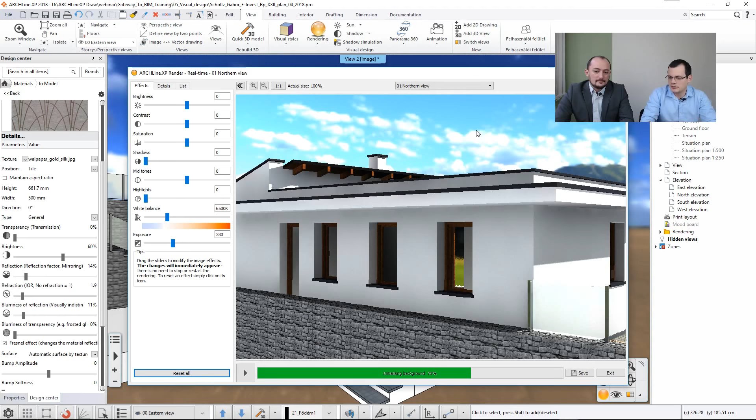This actually works like a drawing. You can just zoom in, zoom out. You can handle it in a way that if it's a large image, like you need to create a very large image, even larger than full HD, then you need to zoom in and find the best things for your model.

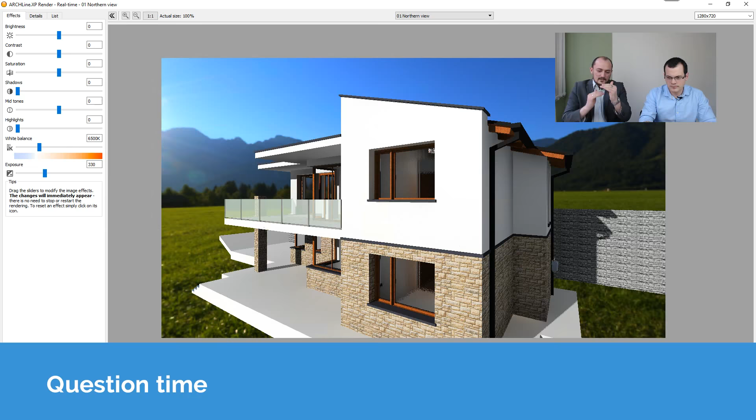But if you have to retouch the image, like if it is overexposed or there's something you need to fix, do it in Photoshop. That's something you need to decide. Look at the image, and if it has brighter features and some shaded features, that's something you should do in a photo manipulator. And if it's only geometric issues, like the composition is not good, you need to crop the image. That you can do in ARCHLine.

Another question: any rules to keep a typical BIM model rendering time low, especially with given details like furniture, architectural detailing, etc.? Would you copy out the model clip to reduce render times? I think this is exactly when we would be using the layers to separate certain elements, just like we did with that apartment we showed before. Elements you don't want to render, like furniture objects, you would just copy to another layer and disable them. That would switch them off in the 2D, 3D, and rendering viewports as well.

About typical rendering times, I think I gave a few examples. Going back to the previous render, which was a quite detailed interior, draft is a matter of seconds, exterior is a matter of minutes, interior would be about 15 or 20 minutes, and I believe detailed would take like an hour if we render it in HD. That's why you have to know the right settings before you embark on that.

Question: what controls do you have on the camera, field of vision, depth of field, etc.? I think this question could refer either to the actual cameras we put down for the walkthrough, or the actual views in the software. Both work pretty much the same way. The FOV you can change by simply changing the angle of the camera, the viewing angle. The depth of field is something that is not currently supported. On how to set up the views, we covered that during the first session, I believe.